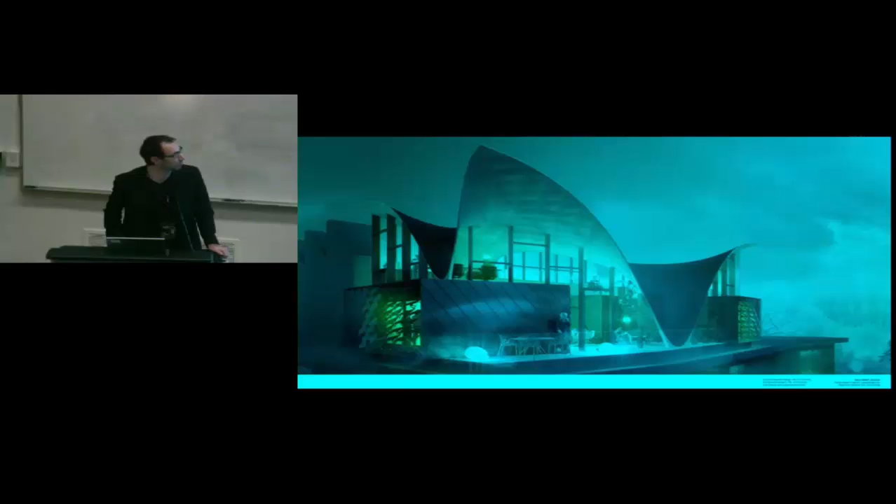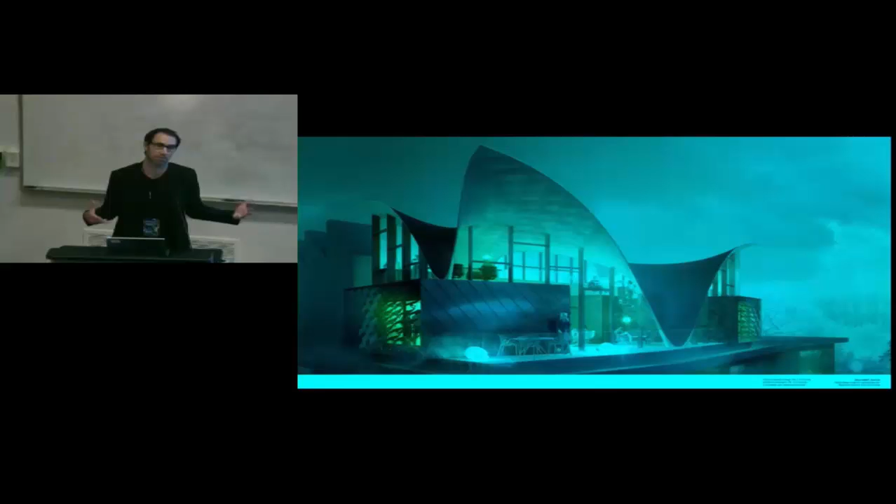In architecture, it's scaffolding; in 3D printing, it's support medium. In both cases you really want to minimize them because they're painful and expensive in various ways, from actual costs to indirect costs. For example, in this project, the ability to avoid scaffolding allows us to work much more quickly on site because we can get in under the roof and already be working and implementing, and especially scanning the project to continue working.

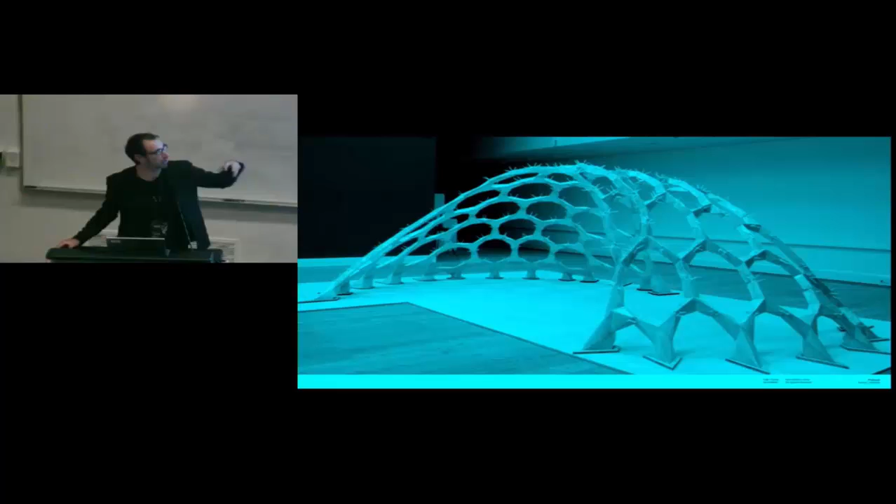In previous projects, we've tried to avoid scaffolding in other ways by building aggregative structures where discrete post-tensioning allows us to work, build up, and have self-supporting structures. Here, we used flexible formwork to produce doubly curved structures using only flexible fabric and 2D cut, very low-tech molds. It's been a long-term fascination to try to use issues of geometry to avoid complications.

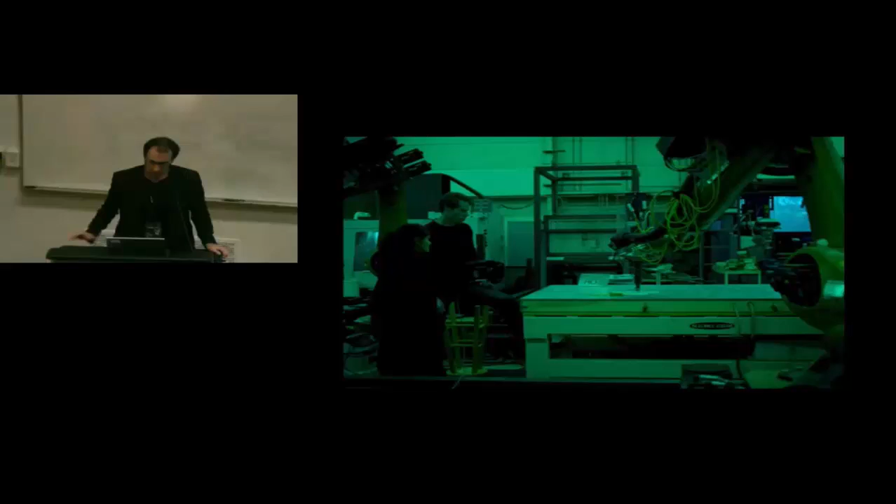So you still end up with something that's doubly curved. It's more or less a prerequisite if you want to make materially efficient, structurally informed structures. They are, by definition, non-uniform, and so you always have this problem of how do you create them in an efficient way.

So in the workshop, the apparatus is a robotic held extruder. We have the benefit of having the 2 robot work cell here in Michigan and the very large heated bed that Wes has made. The idea is that we can try to avoid the normal problem of 3D printing, which is that it takes way too long, and that you have to wait for not only the printing but also the support medium, by printing very sparse nets very, very fast in 2D, and then taking those nets off the heated bed, allowing them to slump, not knowing exactly what shape they will take, and then having to discover that.

We can simulate and test. Here you see the kind of very sparse network covering a lot of area quite quickly, and then hanging that. This is the process of the robot—the second robot, because we're spoiled around here—which picks up the scanner, a 2D laser line scanner, generating 3D data via the robot's motion itself, which then allows us to grab a point cloud. The point cloud is great, but it's not quite easy to follow.

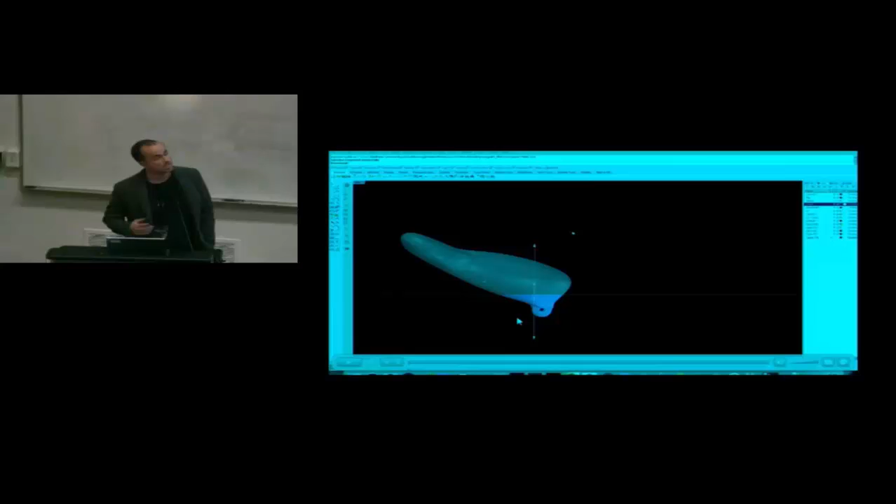So you can see the center of mass here, and the center of buoyancy there, dynamically being solved through this simulation to predict through the design process what you would have if you just launched this thing into the water. And specifically, because we knew Matt's mass would sit on the butt of this megalith, you get this as a simulation. You can see the center of mass has shifted back significantly, and we get a more horizontal condition.

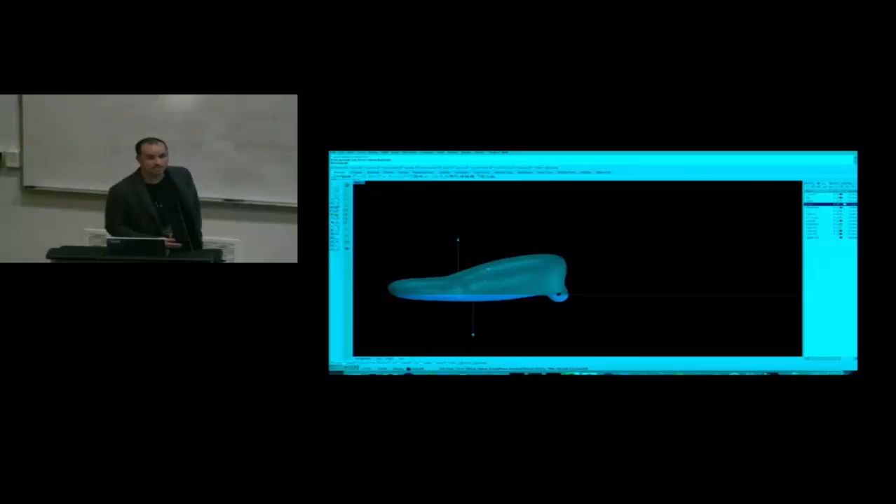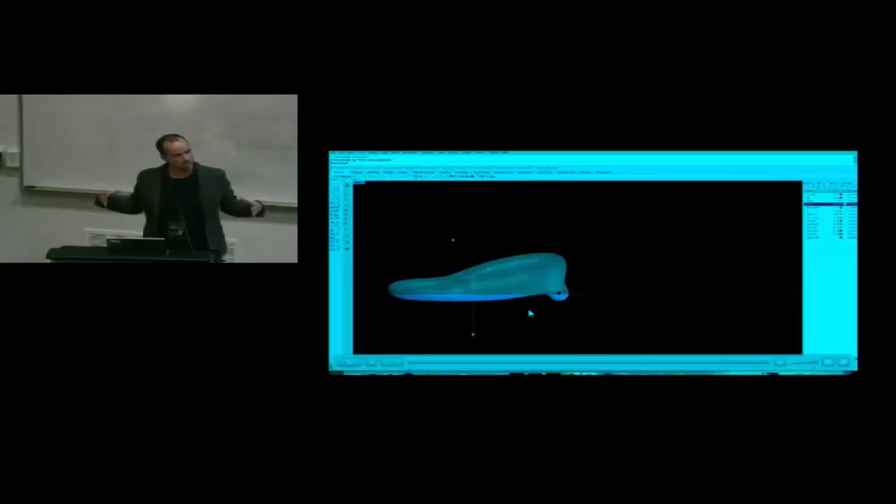Just want to note, because this is an elevation, the section through the torso is a perfect circle, meaning it's not stable in rolling. However, the back is quite wide, so the back is your stabilizer. And Matt was instructed to sit on a single point right here, roughly.

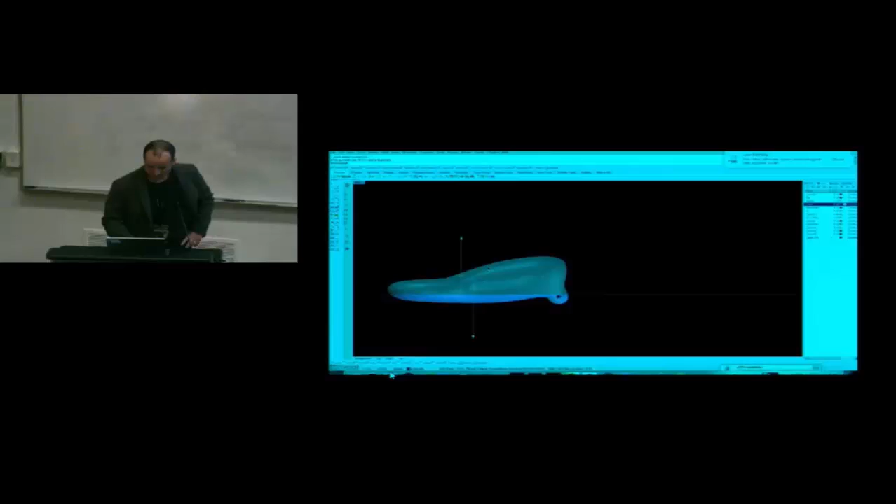And of course, we 5-axis milled this. Maybe I'll speed through this process here. So this is the first half that's being milled. Thank you, Dustin, for all your hard work.

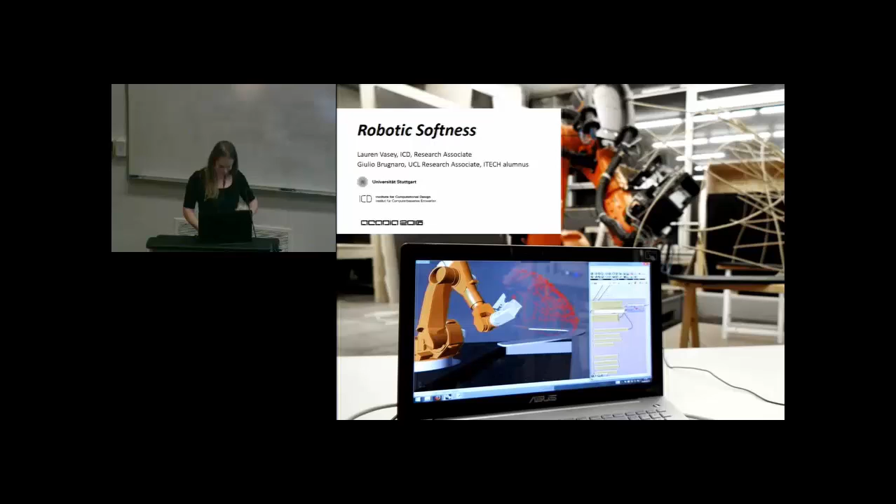So at the ICD, we have two primary research interests. One is computational design, as it challenges characteristic methods of design, as well as computational connection to fabrication technologies such as robots, which allow us to challenge conventional ways of making.

So some precedents about the kind of work behind the robotic weaving agenda we were pursuing in the workshop is this idea of behavioral fabrication. It's basically fabrication made possible by sensor feedback and interconnectivity between devices, people, and machines. We're looking at trying to program robots with behaviors rather than instructions that are like blueprints or notational design systems.

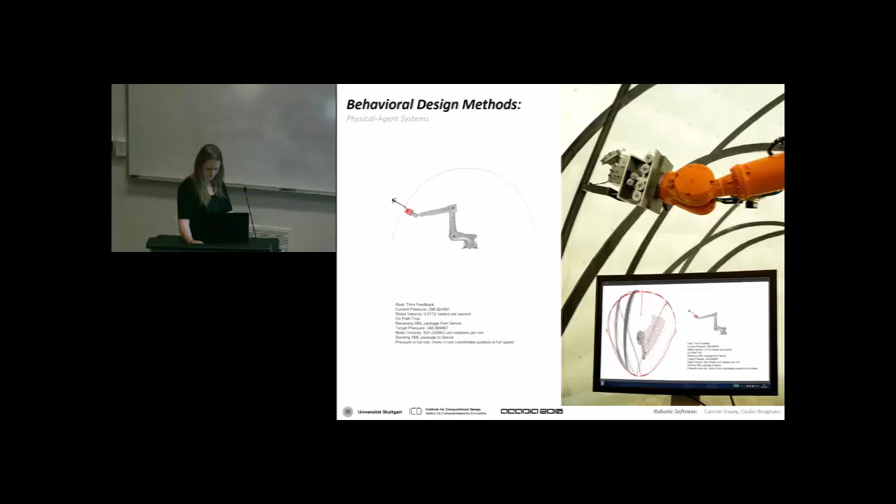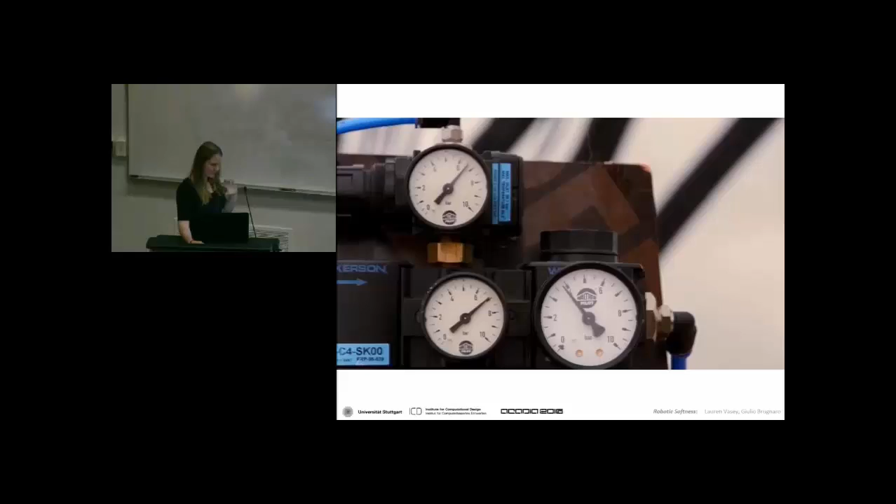This was first investigated by the Research Pavilion 2014-2015, which I presented last year at ACADIA, in which we were looking at agent-based behavioral design methods as a means to mediate between performance criteria and fabrication constraints, to produce robotic paths or fiber layout for a final design of a research pavilion, which was basically a pneumatic inflatable reinforced with carbon fiber.

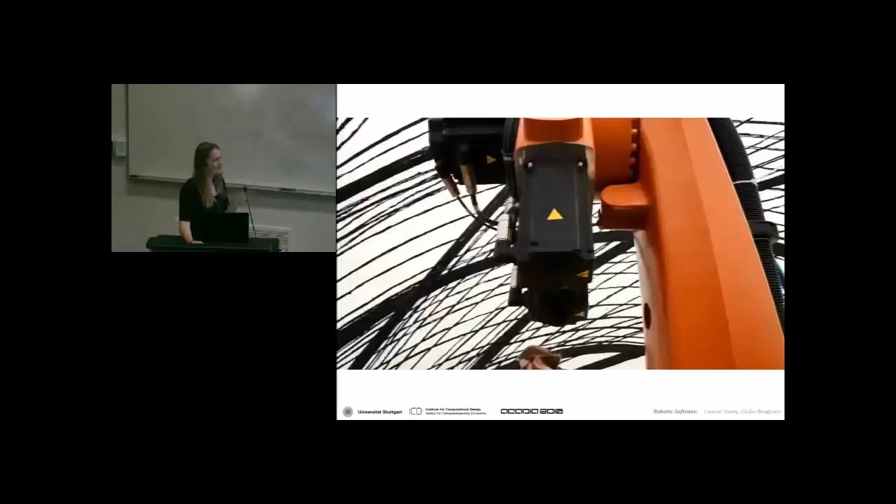And actually the robot is also programmed with behavior. It's force sensitive, so it knows when the force is too high and it can adjust its path based on this kind of environmental data that it's getting back.

So in addition to teaching the design studios for the research pavilions, I also teach behavioral fabrication in both an advanced robotics course as well as a thesis topic. We've defined four trajectories.

One, biological role models. These are very interesting because they don't require a high level of knowledge about the world - they can just react to their environment. They were actually very interesting to roboticists in the 1970s and 1980s, and we're continuing that thread of research.

Fabrication and assembly sequences and processes, adaptive forming processes, as well as interactive and collaborative fabrication processes.

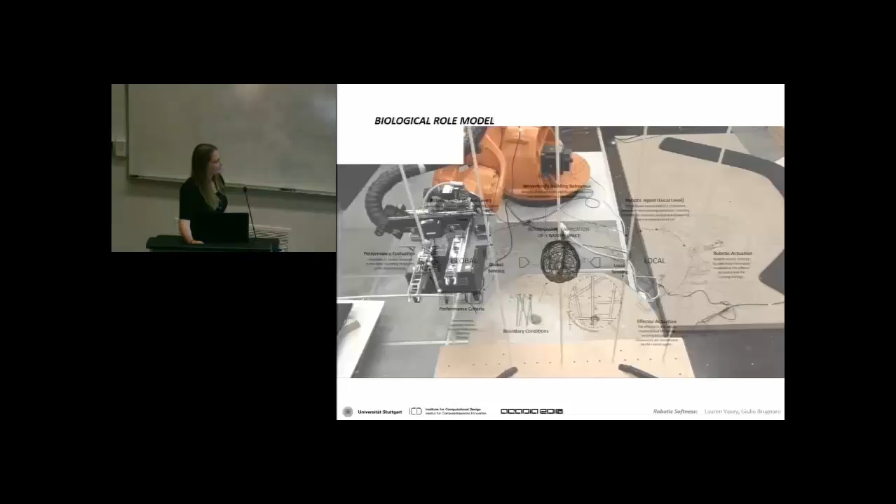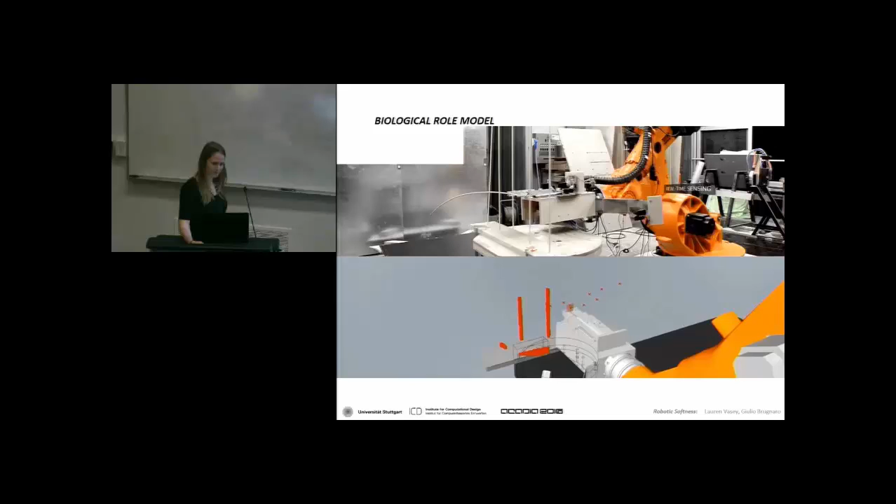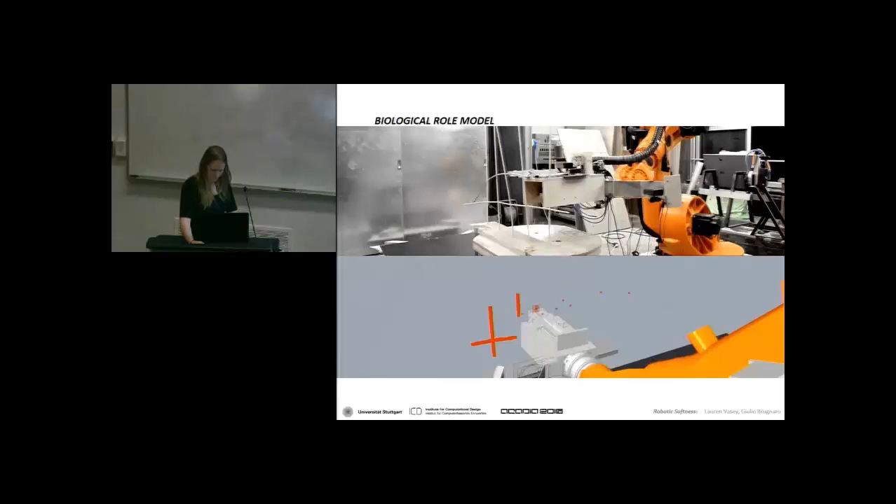So Giulio was an ITECH student, and he came up with this concept for a robotic weaving process, and he's going to present at ACADIA tomorrow morning. I really encourage you guys to come to his presentation to get more information about the background and process and how it's working. Basically there's scanning and a logic of a behavioral agent-based model, which allows him to weave on what he's previously been weaving.

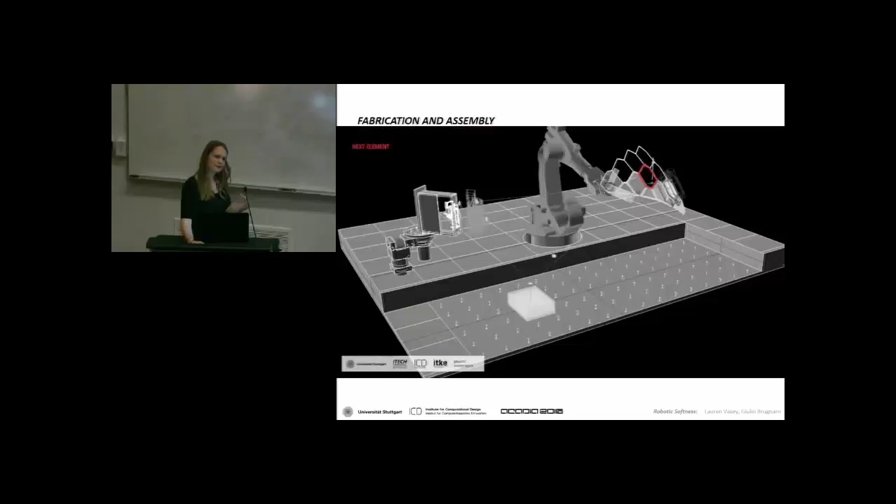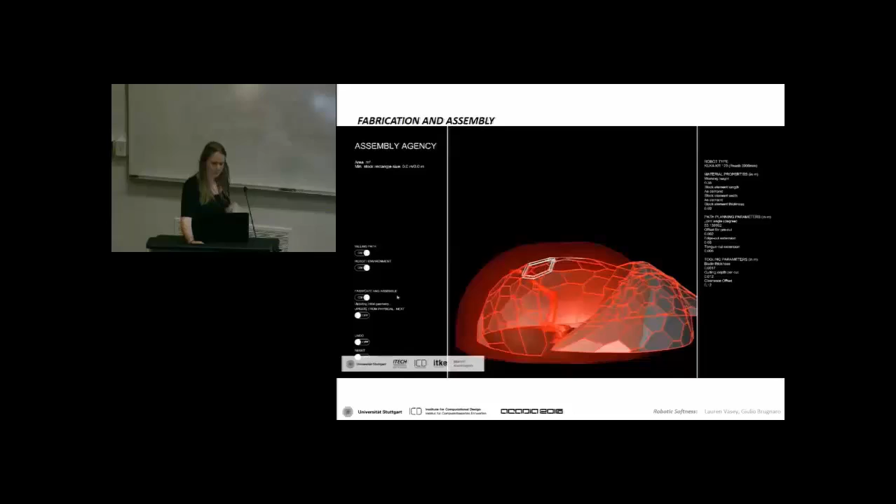This is another project looking at the research trajectory at the ICD, which is plate typologies. Can we use the robot to do more than just process the parts? Can the robot actually be assembling? And how do we design for the conditions of robotic assembly? We also use scanning to integrate the whole workflow so that we're responding to the tolerances on site.

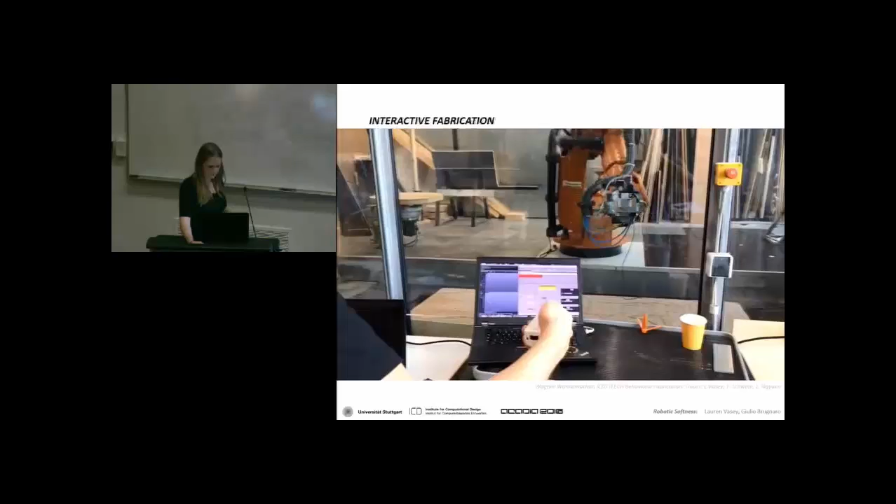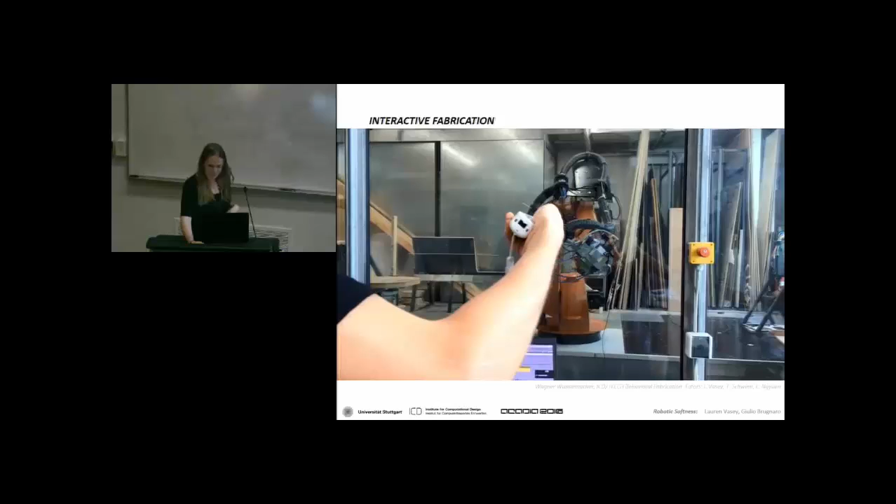We can also use behavioral robotics in a kind of adaptive forming process. This was work from our behavioral robotics course that finished about a month ago. In this case, we're also looking at gesture recognition and online robotic programming to control a robot, potentially to implement it on a site such as a construction site, which is unstructured, and therefore it's better to have these online and adaptive processes.

Tomorrow morning I'm going to present another project about interactive fabrication - a human and robot collaborative process, a project the ICD did with Autodesk Research, in which we had untrained people come to the exhibit, get an Apple Watch, and it would lead them through an interactive fabrication process with the robot.

For our workshop, we were interested in taking the process further in four key themes: material behavior and fabrication-informed design, developing methods—whether agent-based—that obey both the conditions of bending active geometries and robotic constraints, using scanning and machine vision to import information about what we've already constructed, online robotic control connecting directly to the robot, and behavioral fabrication, developing behavioral methods of design that we can upload directly to allow the design to emerge through the process.

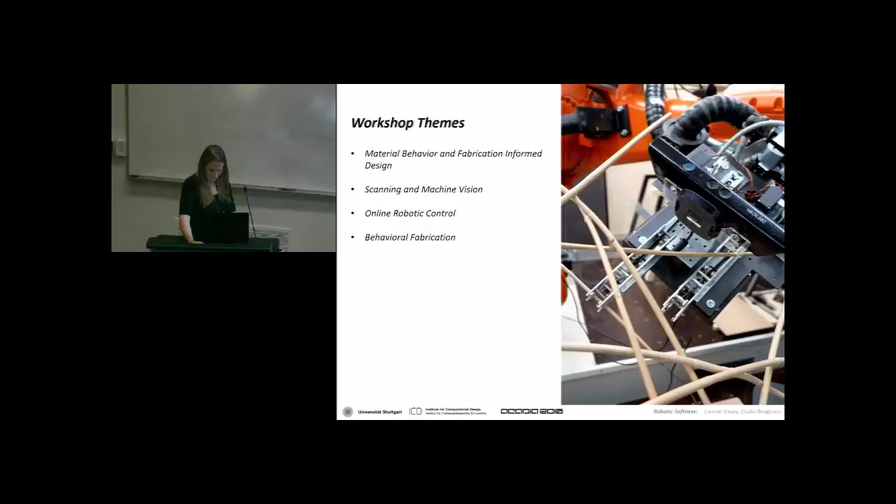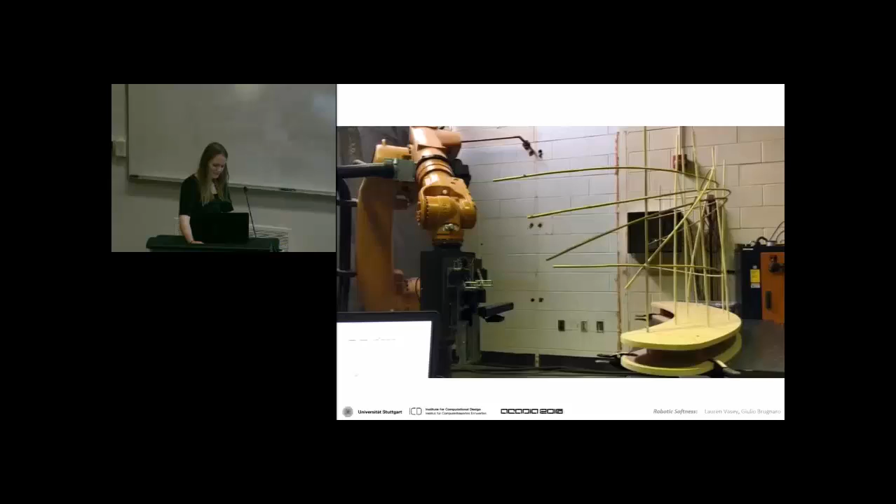So we worked both digital and analog—these are some of the hand models that we made. And then we implemented a scanning project. So the whole weaving workflow was working by the end of today.

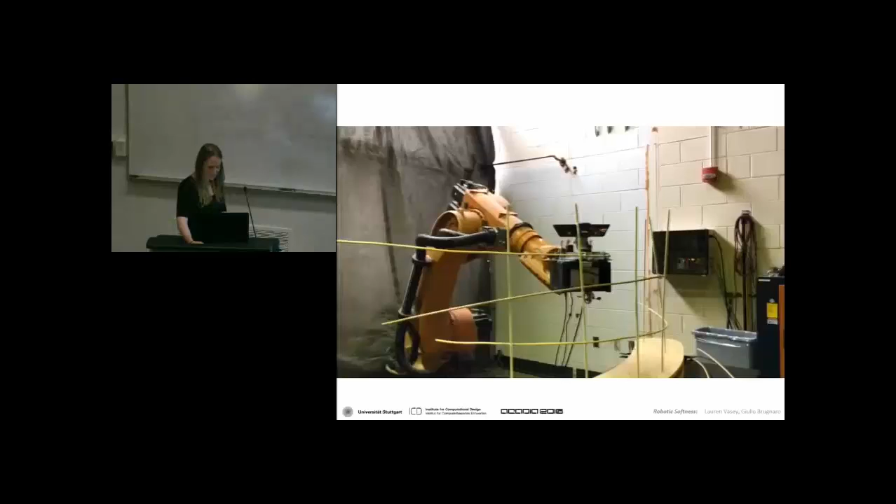Here you can see we're also using a Kinect to scan all of the geometries. This is sped up—obviously some of you might have gotten a peek into the actual fabrication speed. If we continue the development on this project, I think that's the next thing that we'll look into.

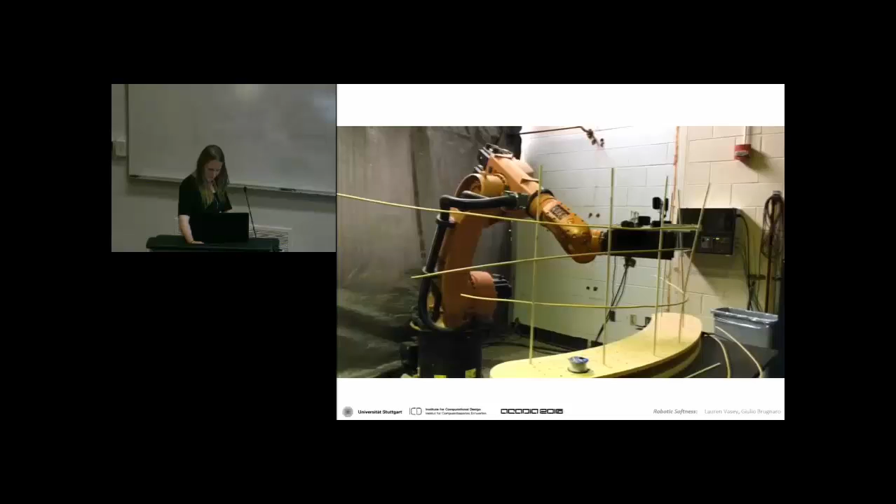But basically, we finally completed a woven prototype this afternoon, and it was really great to work with everyone in our workshop, so I want to say thank you. I want to also say thank you to Giulio for teaching with me, and we hope to continue the work.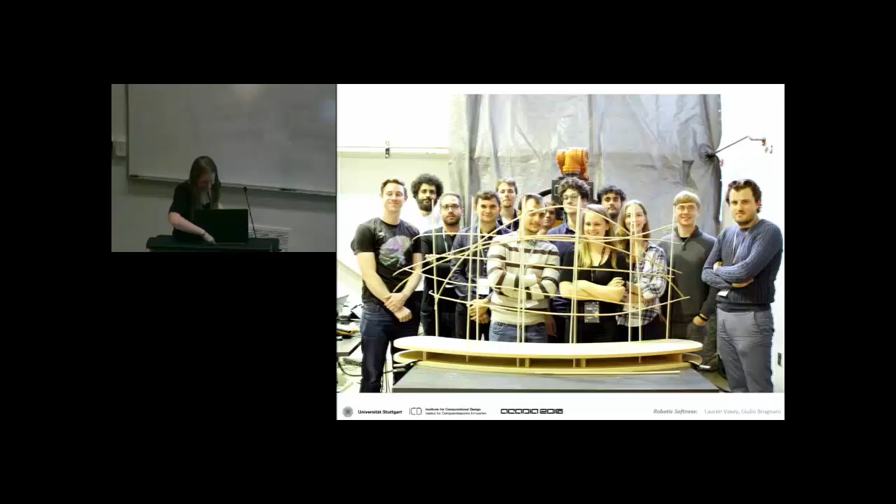Good luck with the adapter. Thanks a lot, Lauren, that was amazing work. Luckily I've got a Thunderbolt connection instead of VGA, so I should be a little bit quicker.

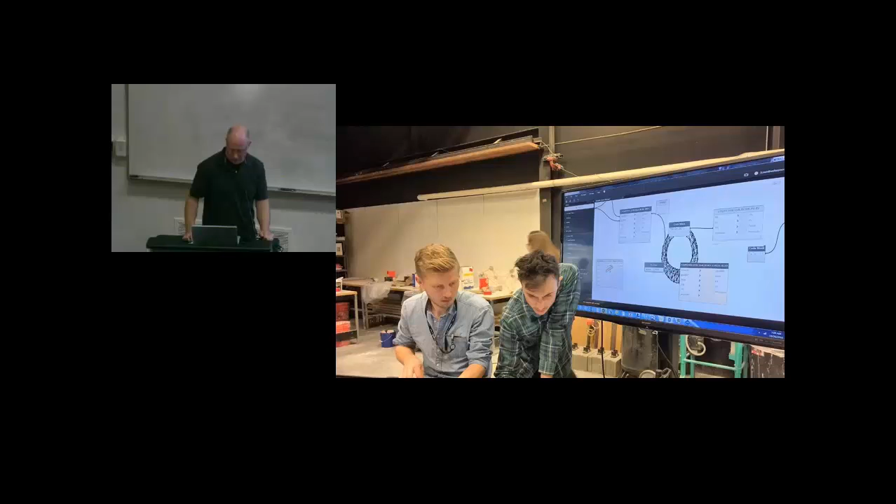The analysis package that Steve wrote was a connection to GSA Oasys, the structural analysis application that Arup primarily created, which a lot of people are using around the world. That's connected to Dynamo as a computational design tool for geometry and the overall program flow.

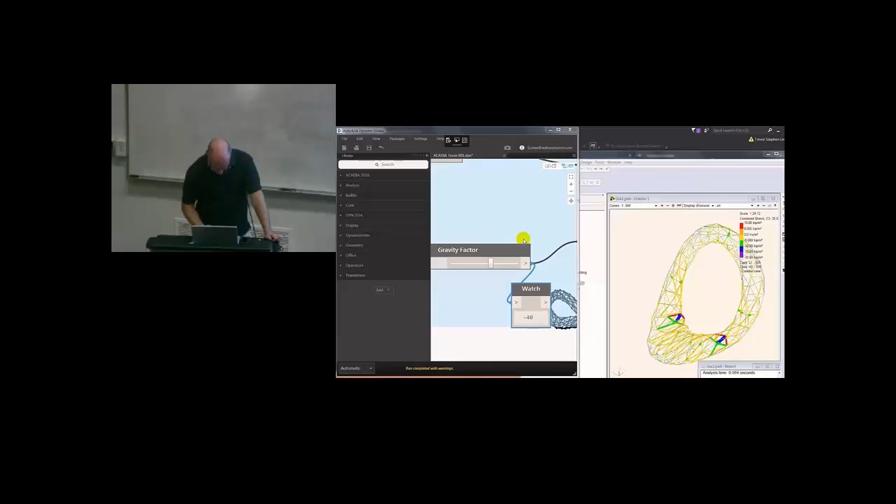So this is a quick video of that process—let's see if I can run that. You can see Dynamo on the left, a standard visual programming environment, driving this analytical tool directly to understand how the overall form is going to behave.

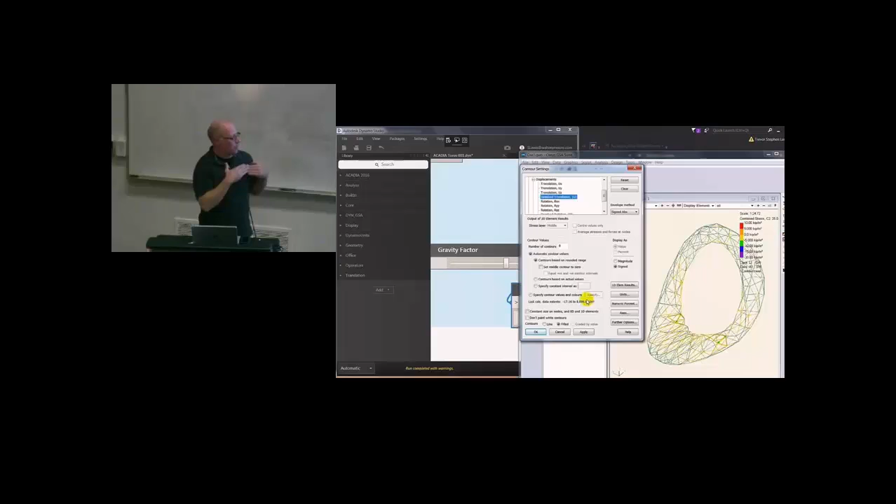In this case, it's a span of about 15 feet tall, basically a big cantilevered structure. The base is essentially weighted down, or a moment connection to the floor, and then it's just spanning out on an angle from there. So you can start to see the deflection, and start to see where the actual stress is going to be concentrated along the way.

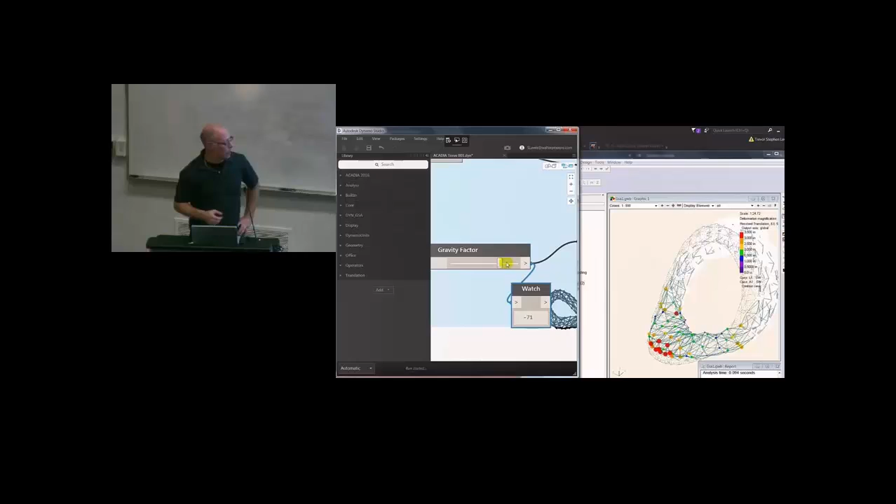And they were able to use those results to directly inform both the topology of the shape and then the species of wood that was going to be used for the rods. So further refinement in Dynamo.

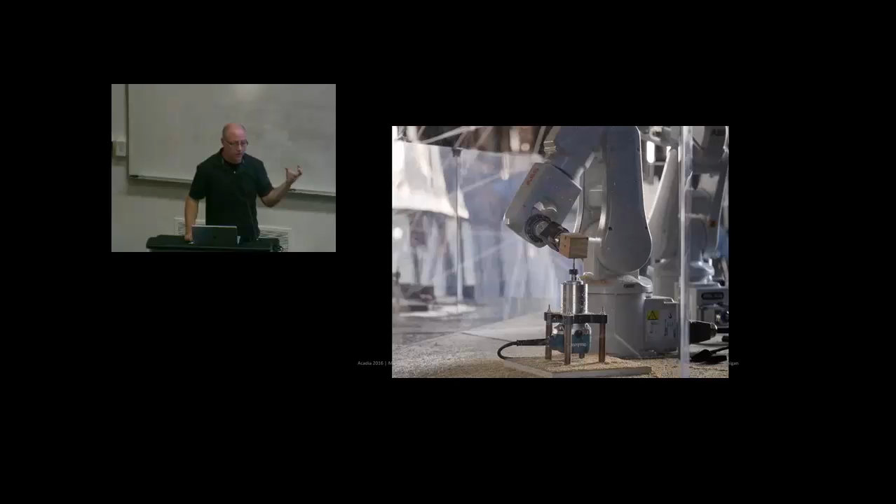As I mentioned, the actual process, primarily from Nathan King and Nick Coate, was keeping the actual tool stationary and moving the part instead of moving the tool around the part. So in this case, it's basically a spinning milling bit that the work piece, this node, is actually being dropped into.

What you're using Dynamo for is to compute the angles for each one of these nodes, computing the correct angle and configuring that. It was about 260 nodes created, each unique, primarily 6 valence connections. So you've got an interesting conjunction right in the middle there.

And obviously indexing and numbering is very important in that process. So the participants ran through that process of design and then fabrication of these, and then assembly is ongoing.

And then Robert Solovione came in and said, you know, I have a great way to create the rods in a digital way as well, to cut down on human error. So we actually use the mill today to lay out the rods and then index them, figuring out rod lengths, which are all primarily different, stacking them in a tight configuration, and then using the mill to chop them to the right length.

And then the assembly process is ongoing, kind of in the same tradition Dave mentioned, aim high and get pretty close by the end. I think that's ongoing with the team. This is basically the process that we've been going through.

Shifting gears, so this is the next one, primarily led by John Haymaker and Mohammed Asl, and another set of people from Perkins and Will. This is an interesting multidisciplinary project called Design Space Construction that's been going on for a number of months now, and it's coming to an interesting point of coming together, defining the agenda, and testing that in workshops like this.

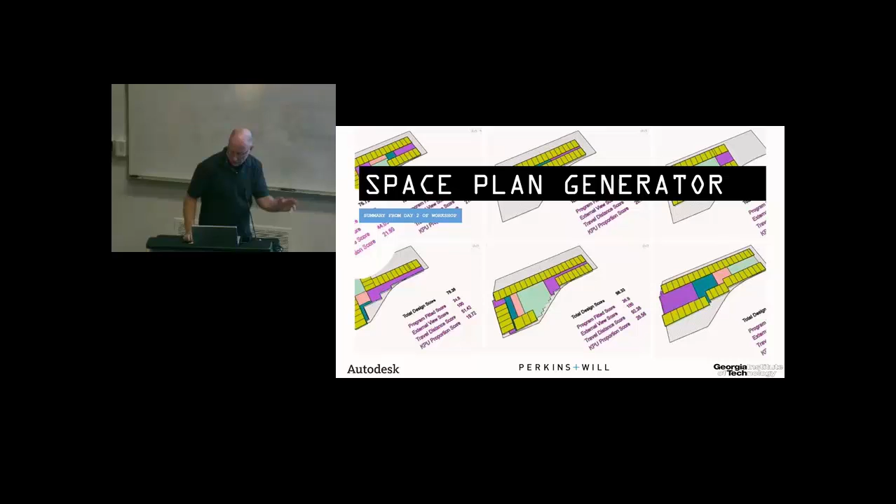Again, a lot of academic research over the last 30 years, but it's never really come together with this level, over time, in a tool that someone can use outside of an academic environment. So that's ongoing research that was tested by this audience.

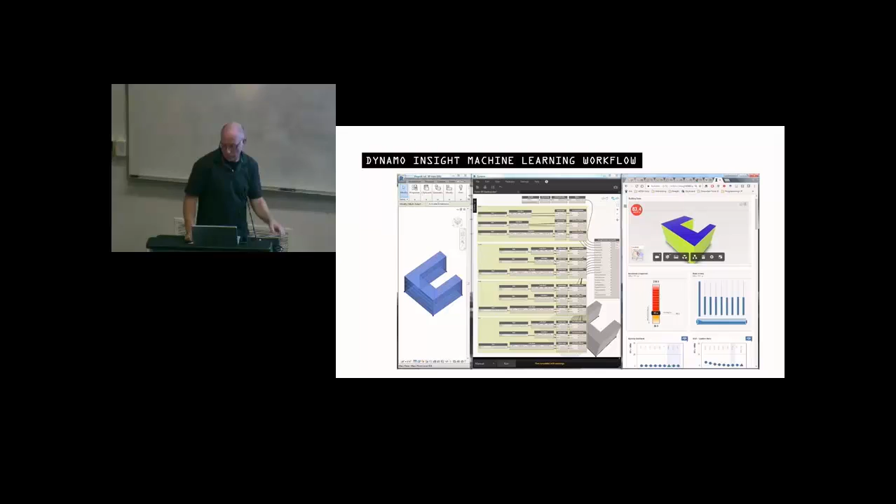On the second day, the team worked some more, broke into smaller groups of 3, and then went into another design exercise, looking at machine learning to understand how to take energy analytical results and apply them more effectively to a design. Basically, you can get very fast iteration through many different design alternatives using these types of techniques.

And then the last one was a more detailed design exercise of a child care center. So pretty interesting work coming out of that. Primarily it's not about running the analysis, it's about how you use those things as the language and interpret the results more effectively to make decisions, and then, of course, running through multiple options and evaluating them.

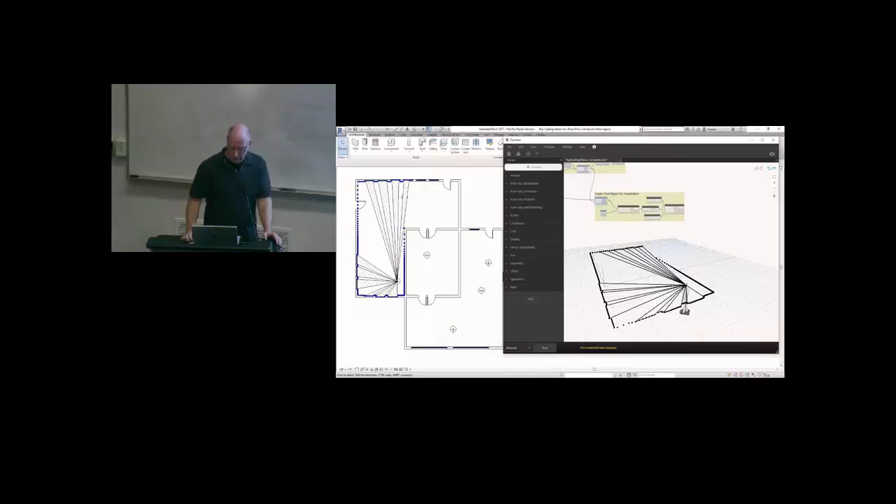So lastly, we have Computational BIM in Practice, which was Konrad Sobon and Nate Miller, Conrad from Grimshaw and Nate from NBBJ. It was really about how you use computational design tools like Grasshopper, Dynamo, and now Flux together in practice to solve real problems, getting the people working on design and exploration tightly coupled into the production process so information doesn't get lost. A lot of space planning, blocking and stacking, view analysis for particular room layouts, and primarily learning how to create these tools and use various analytical techniques.

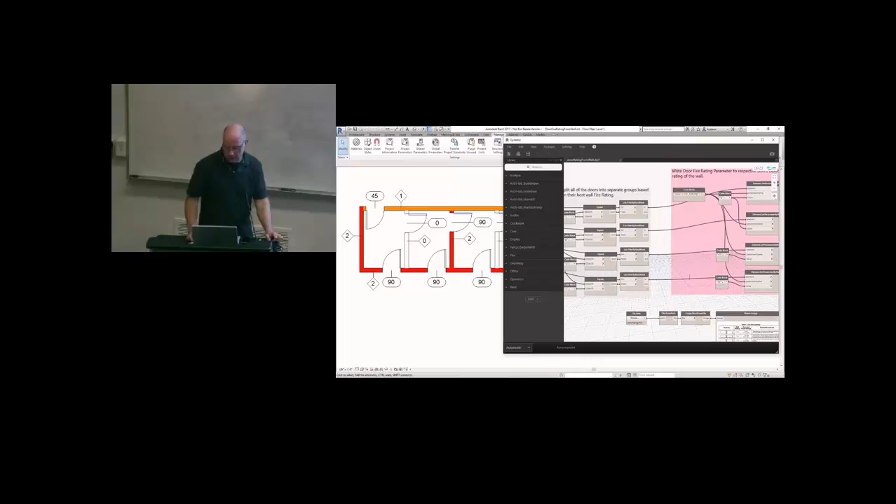Pulling information out - we have so much information in Rhino and Revit and all these other places. How do you pull out the information you need and use it? And actually talking about tools like Bumblebee, which is a pretty interesting plugin on both Grasshopper and Dynamo.

More space planning. The team actually got into another tool that Conrad just created a couple weeks ago called Mandrill, which is all about mining information. So much of this is about creating dashboards and exposing information that's there, that's latent, that's not visible. This is actually using web technologies like D3 and a lot of JavaScript connected into visual programming platforms to do a lot of graphing really simply and easily in a way that it can be used to create interactive dashboards.

That's the great thing about a lot of these components - you can take them off the shelf and integrate them and you don't have to do as much work. So standard parallel coordinates charts and things like that are pretty easy to create that way.

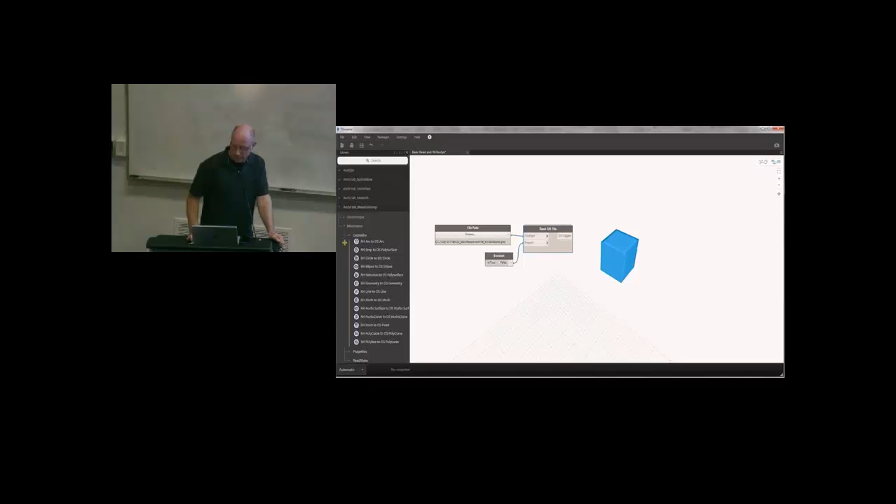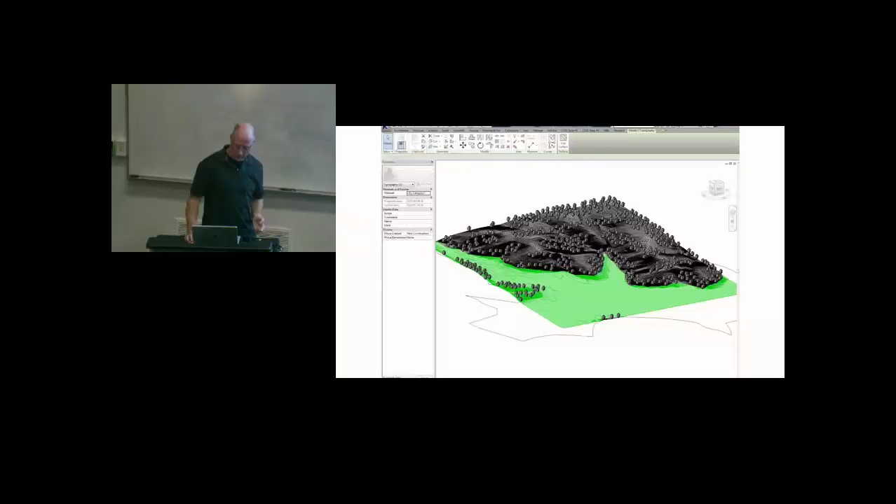Then they got into collaboration and interoperability between Rhino, Grasshopper, Dynamo and Revit, and looked at Mantis Shrimp, which is basically on your client machine connecting information. Then they started looking at Flux, which is all about taking information from one source, telling this online service what you want to propagate up to a cloud service by these data keys, and then pulling it down through a variety of other clients - could be Revit, Dynamo, SketchUp, Grasshopper, doesn't matter. In this case, looking at site, pulling in topographic information using Dynamo, and then populating that in Revit were the areas of practical use of computation from that.

So with that, I want to talk about just one more thing, and that's we have a new space. I really love the facilities here - they're amazing from a fabrication standpoint, and I was just at ETH, so seeing some of the work that Dave and Russell have been doing has been really amazing.

We just opened up a new office at Autodesk in Boston. We moved downtown, and part of that is this thing we call the Build Space, which is similar to a space we have in California called Pier 9 - it's basically a place to collaborate. If you have interesting research you'd like to do, you can apply and submit a proposal as an individual or as a team of researchers and come on site to use these facilities.

They just opened up like two months ago, and we have robots, lots of robots. We have a gantry crane, lots of materials, lots of fun equipment to use, and interesting work happening right now. So definitely encourage you to take a look at that if you're interested, or if you're in the Boston area, stop by and we'll talk.

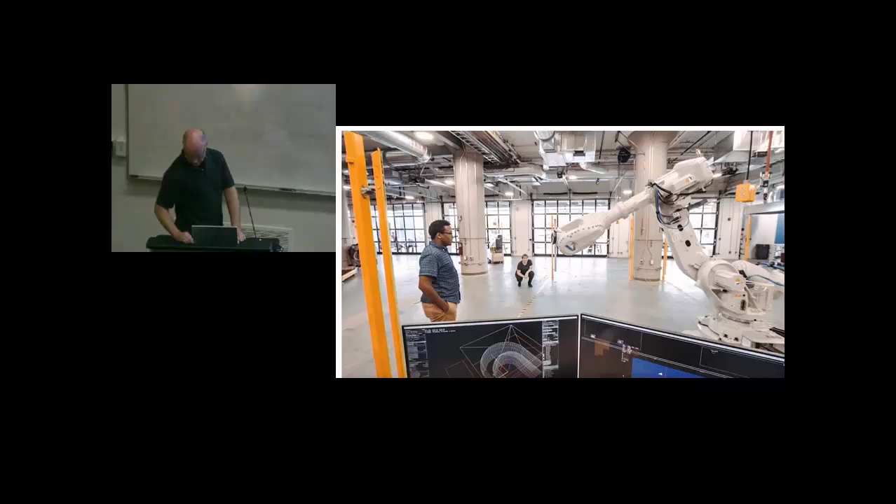Okay, so we're going to invite the four that just presented to join us in a panel discussion now on some of the work. Well, thank you all for presenting your workshops a little bit more in depth and some of your own research work. I think it brings up some good topics that I feel like are going to come up again and again in the conference, and things that we're going to end up just beginning to discuss here.

But a few things that came up in different ways - I heard lots of discussion about different ways of construction, different ideas of efficiency, optimization, even the data, and how you even go about assessing what you choose to look at, or even the things that end up being down the line and how that works with us. So I think Wes and I are going to ask questions specific to each of you, but feel free to answer as well if it was asked to somebody else, because I think there's interesting cross-pollination that could happen here. So Dave, since you went first, we'll throw the first one at you.

Wes and I were talking about this with you earlier. One thing we always admire, particularly when you're doing workshops, is that you jump into something you've never done before and really fly at it pretty hard. Something that came through your presentation, and what you're doing, is clearly an interest in a feedback loop, in the production and the interest in how to efficiently produce the roof you're all working on right now.